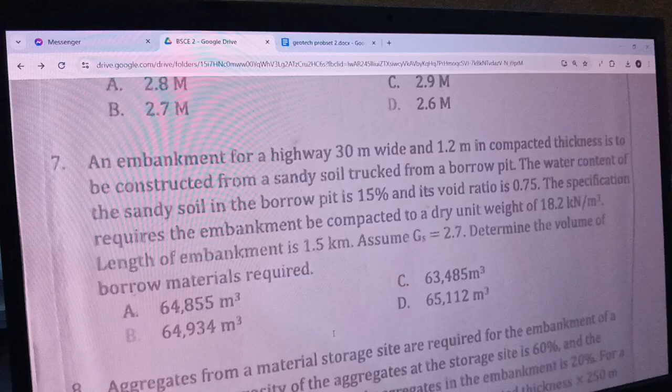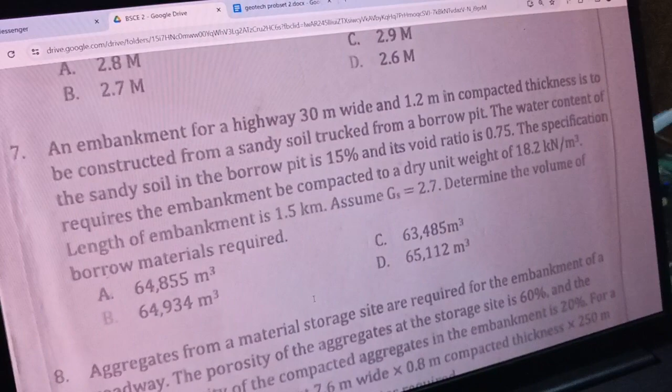An embankment highway 30 meter wide, 1.2 meter compacted thickness is to be constructed from the sandy soil trucked from a borrow pit. The water content of the sand soil in the borrow is 15% and its void ratio is 0.75. The specification requires the embankment to be compacted to a dry unit weight of 18.2 kN per cubic meter.

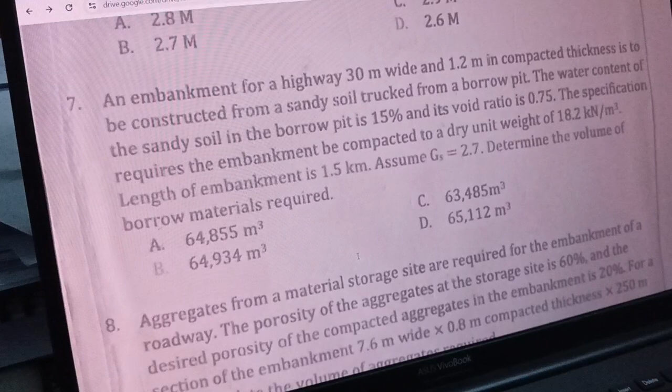So length of the embankment is 1.5 km. Assume GS to be 2.7, determine the volume of borrow materials.

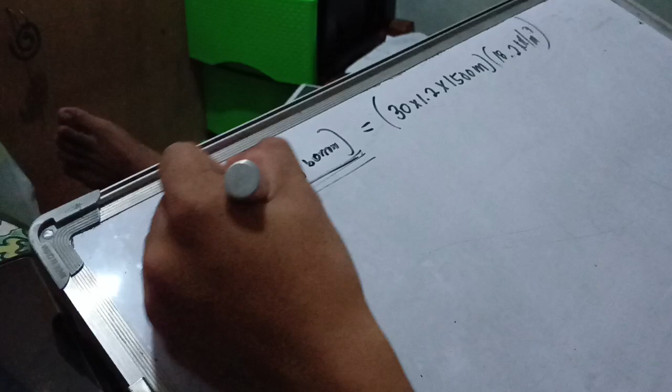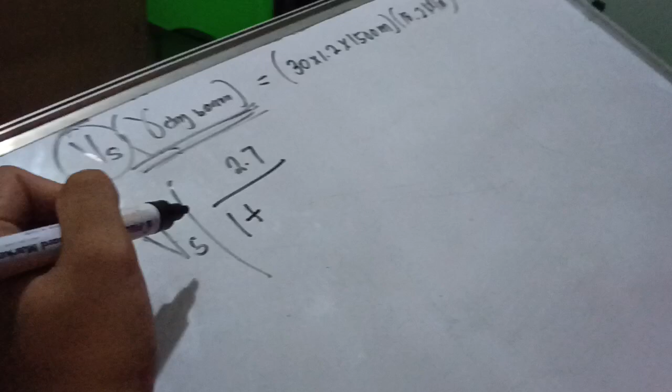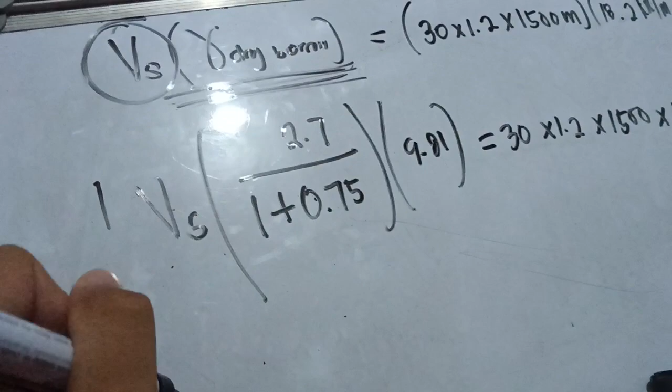So 0.75. Times 9.81 is equals to 30 by 1.2 by 1,500 by 18.2. Then solve. Divided by 2.7 over 1.75 times 9.81. So naka 64,933. So mao na letter B. 64,933.74. Sunod.